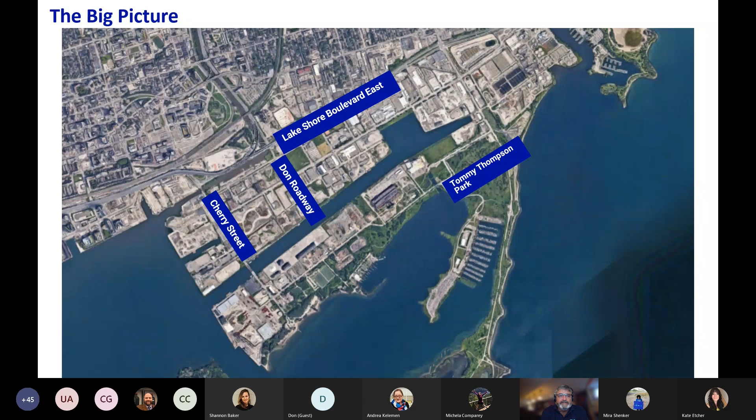With respect to the work we're doing on Port Lands flood protection, we'll be adding about the equivalent of 25 football fields of green space to the area. We're going to zoom in on that area in a minute, but if we can go to the next slide, Michaela or Kate. Oh, there it is. Thank you.

So you can see the area of the project for the Port Lands flood protection work. That work is underway, as Mira mentioned, and this is what it looked like from above several years ago, before we started. We're almost just over halfway through, and are on schedule to complete the project in March of 2024. So next slide, and we'll show you what it'll look like when we're complete.

So you can see we're doing a very large project here, but it is not all of the work that needs to be done. There are other parks that need to be completed once we've completed the river, and three parks, three roads and bridges that we're undertaking. Then there will be development happening on Villiers Island and the south of river precincts, over the next, as I say, coming decades.

You see the new mouth of the Don, Canoe Cove at the mouth of the Don, where we've renaturalized pursuant to the Don Mouth EA, new Cherry Street in its new alignment, and a rebuilt Commissioners and Don Roadway, which are being built to ultimately accommodate LRT transit, but also to accommodate future development in terms of traffic, cyclists, pedestrians, and services.

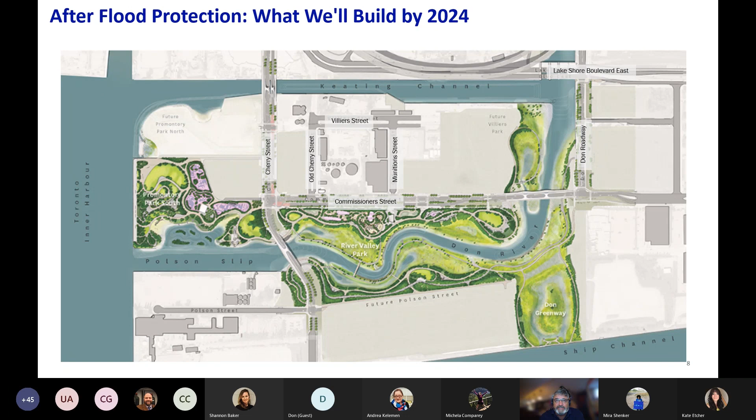Next slide. So an update of where we are today. Go to the next slide. You can see we're working across the entire site, from the north in the SDMA, or the Sediment and Debris Management Area, where work is just beginning.

In the yellow areas, excavation is complete in about 75% of the river, with just one area left to be excavated, which we call the elbow. It's just south of Commissioners Street, at the intersection of these three yellow lines. Work is actually beginning from a soils perspective on the parklands, which you can see in orange, and utilities are being installed on Commissioners Street, New Cherry Street, and the Don Roadway. So a lot of work happening all across the site, and we're going to show some evidence of that with some video and photos coming up next.

This is just a little animation of the timeline for excavation, starting in 2020. You can see that through June of this year, all areas are complete, with the exception of the elbow, which we will have completed in the next month or two. Next slide.

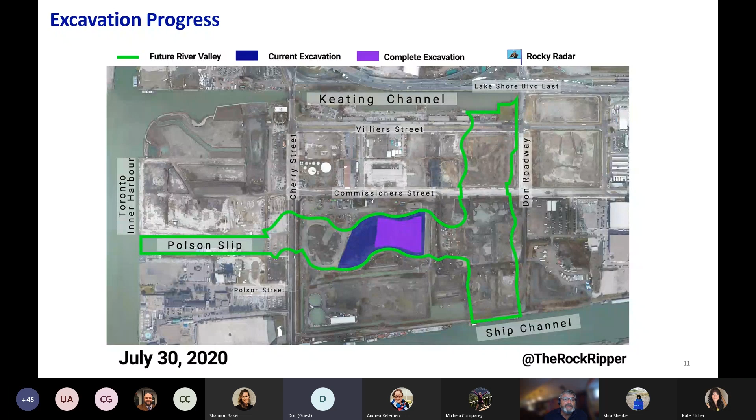You can see the river alignment here through the Central River Valley. It is the sinuous—oh, we've lost the presentation. At least I have. And coming back.

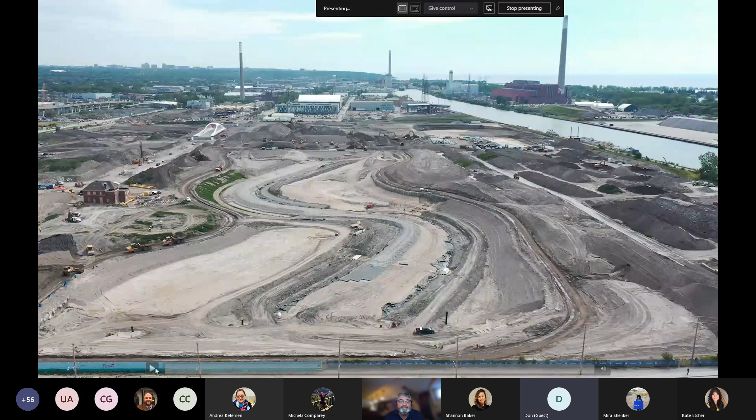Here we go. So you can see the river, the base of the river, the area that the river will follow, is that S curve. That's actually the finished bottom of the river. You can see that we've started excavating at the mouth of the river. So that Polson Slip, we've removed the east end of the Polson Slip, and that's where we will connect the new river to as the mouth.

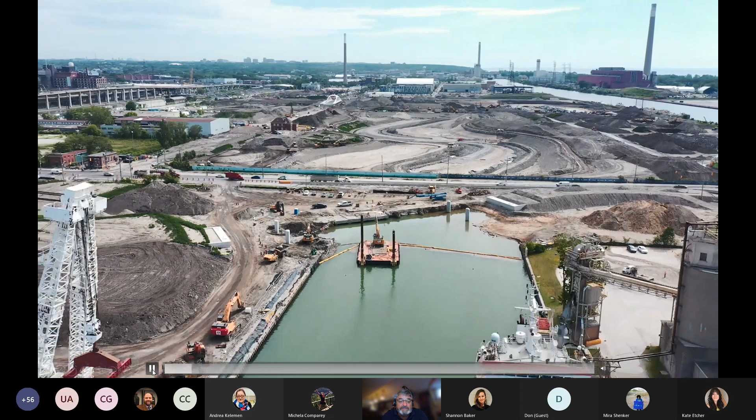It's taking its time. There we go. That work's happening. On the left is the Atlas crane that is being fixed to a degree and will remain in the final park. It's a heritage structure.

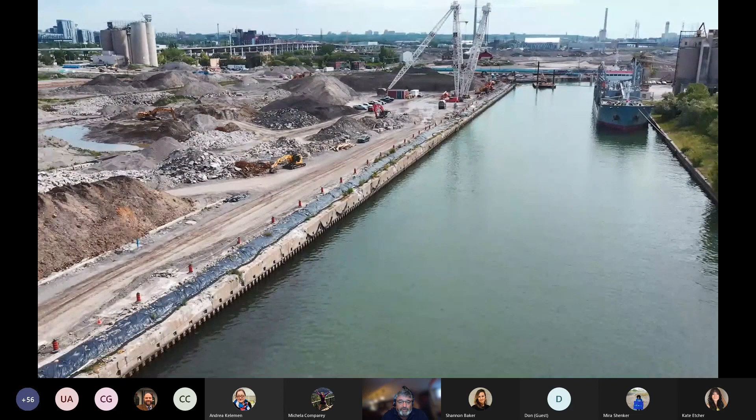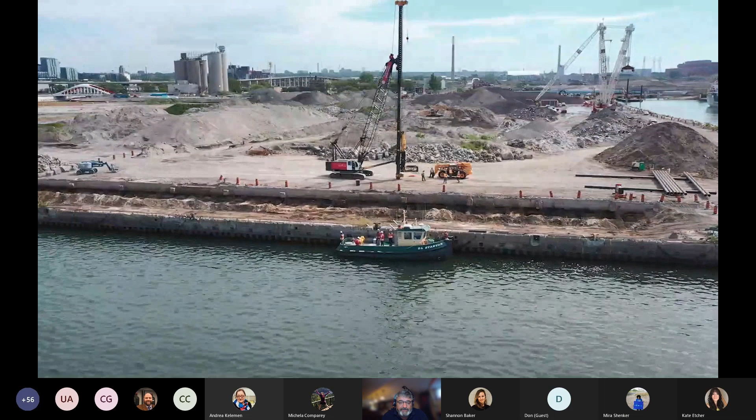Work on the left here is Promontory Park. You can see that we've started working on dock walls. This is the dock wall improvements that need to happen to support what is happening on the promontory.

So Promontory Park is this entire area that you see. This is the Cherry Street Lakefill project that we completed just over a year and a bit ago. So that ultimately will become part of Promontory Park North. That is a future piece of work, not part of what we're doing as part of the Port Lands flood protection.

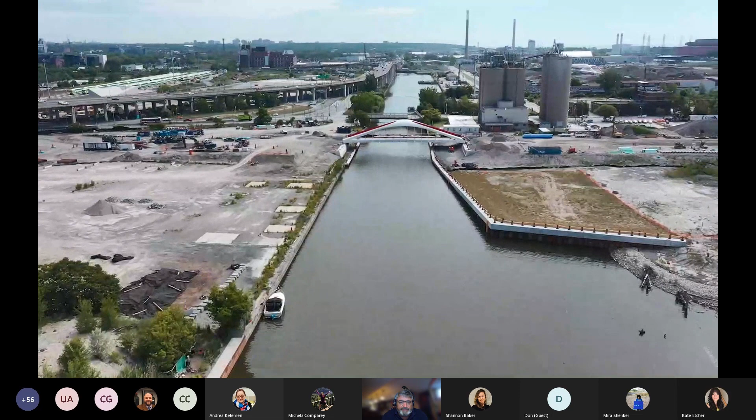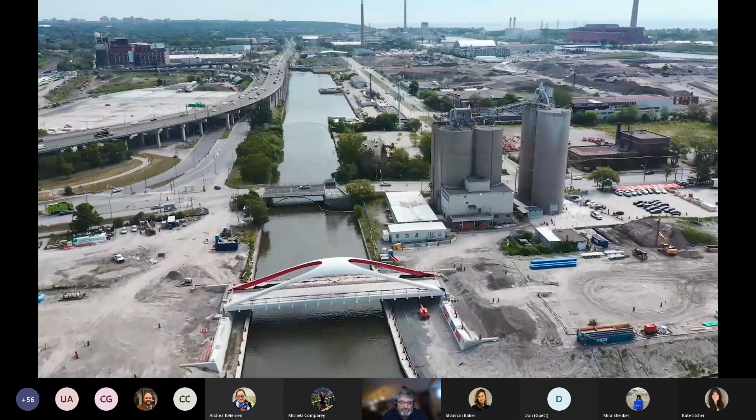You've seen, I think everyone's seen the bridges. This is the Cherry Street LRT bridge. Either later this year or in next spring, its partner will join it, the vehicular bridge for Cherry Street, prior to Cherry Street opening up next August or September.

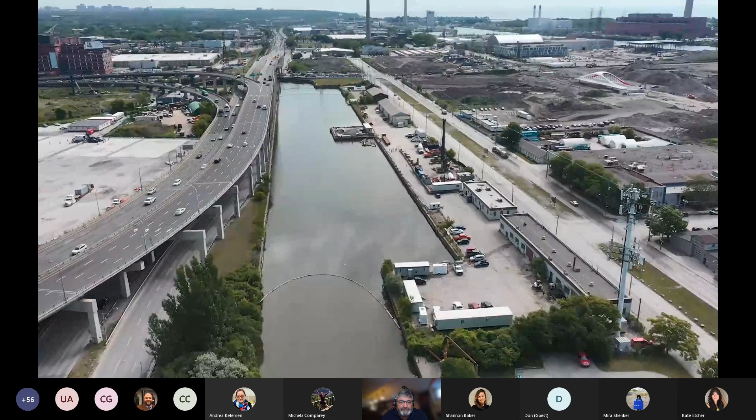Down the Keating Channel, we'll be doing a little bit of work. We're working with the City, Ports Toronto, and TRCA here to undertake dredging, which is necessary to ensure that we achieve full flood protection. The Keating Channel will be part of the flood conveyance system when we're complete in 2024.

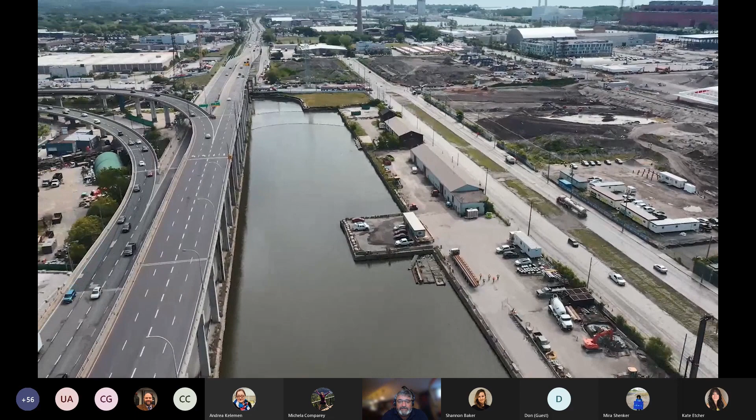You can see to the right, a fair amount of excavation. We'll see that again as we turn up the river. That is the ice management area. To the left here is the sediment and debris management area.

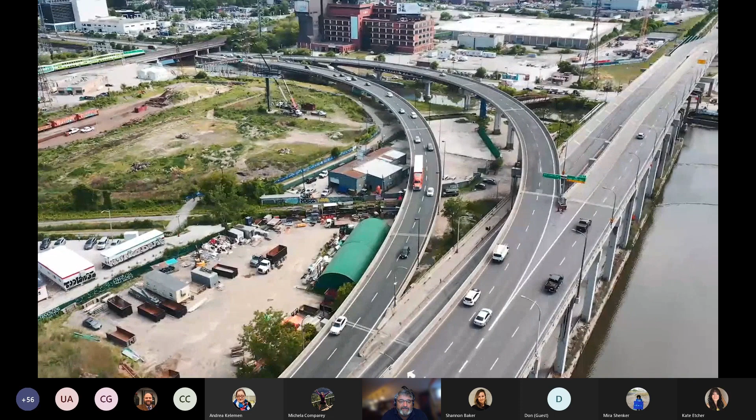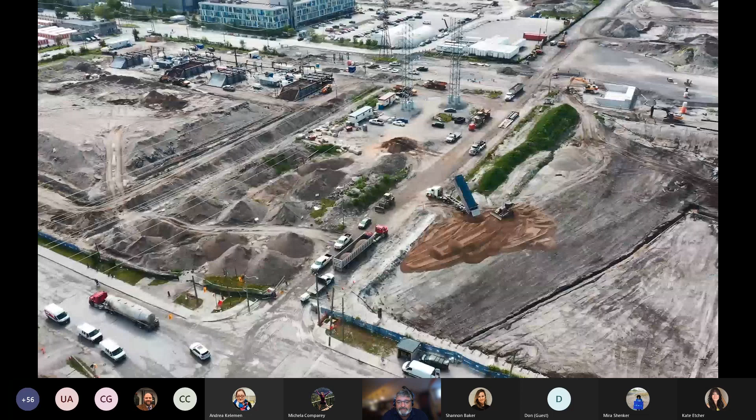Work is started there to clear the site and make it ready for construction to commence in the next month or so. And then as we turn up the river, you'll see that we've started the excavation of the ice management area just south of Villiers Street, which is complete, and we've started to install the environmental barriers that we need there.

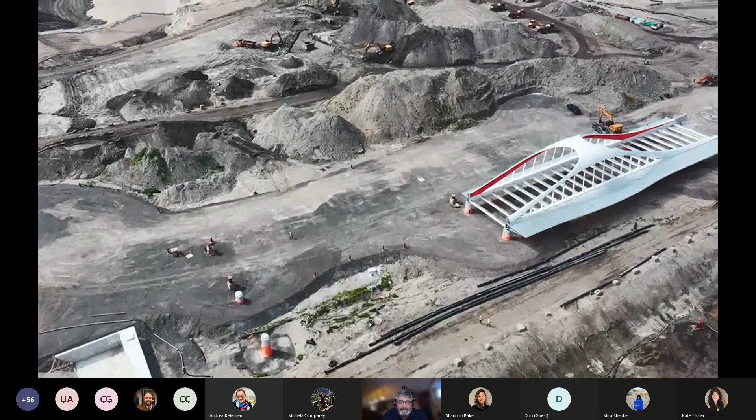In front of us here is the west half of the Commissioners Street Bridge. The east half of this bridge will arrive in late August, early September, depending on the St. Lawrence Seaway. And then here's the elbow excavation underway.

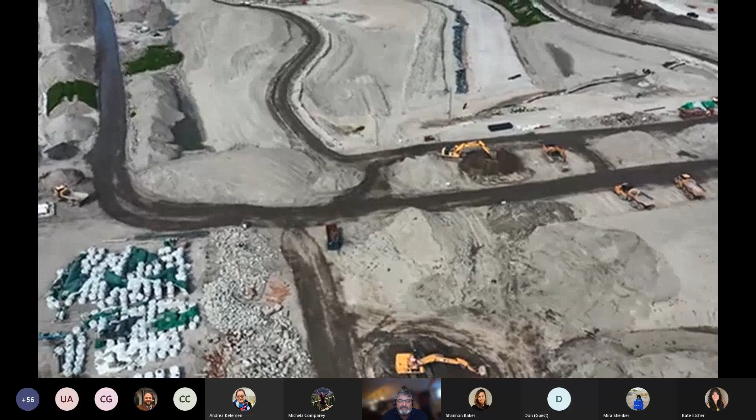And again, back into—we'll see shortly—the Central River Valley with the meandering river valley base and the wetlands on either side, and then parks north and south of the wetlands.

And doing this as a walk takes much, much longer.

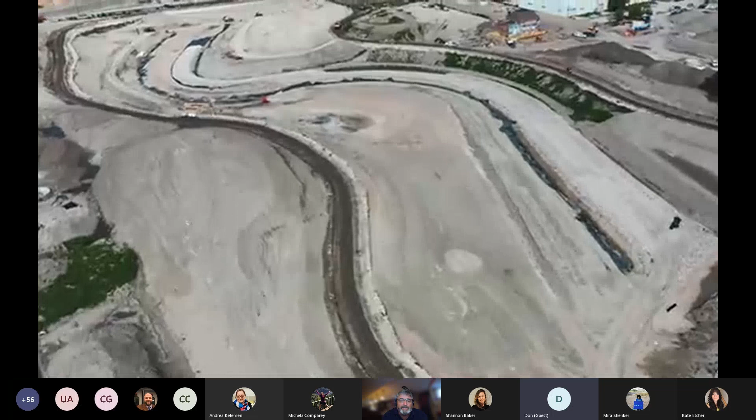So I think that's just about it, with the shot of the skyline always as the last part of what we see here, across to downtown.

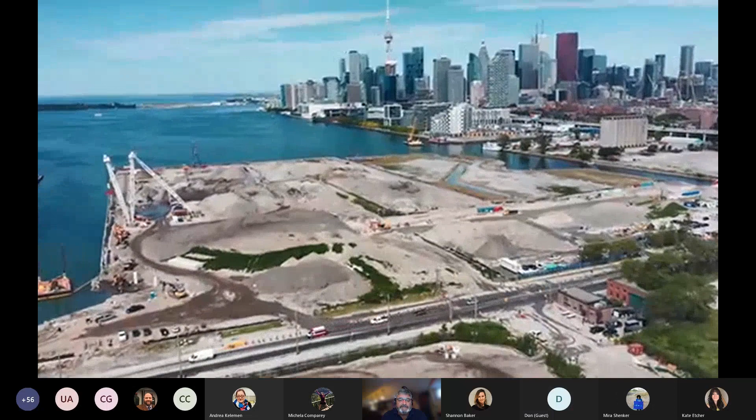So, very large site, work happening all across it, as you can see, by our construction manager, EllisDon, and our consultants, MVVA, Intuitive, and WSP, working very hard to keep the project on time and on budget.

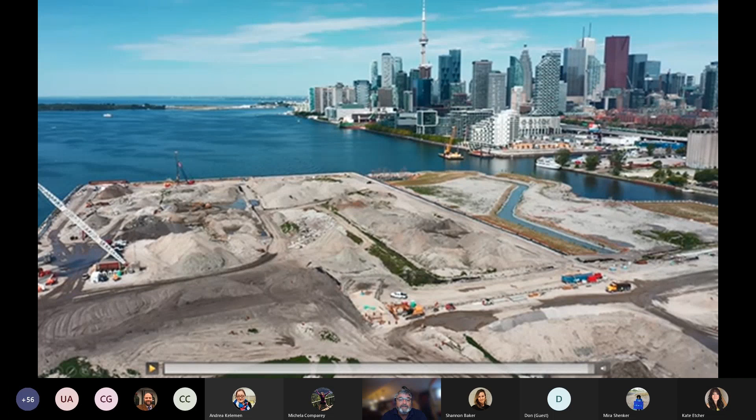So some of the work that's happened recently: we have relocated Fire Hall 30. This is a heritage structure built in the 1920s. It had to move, not very far, but it had to move because of the new elevation of Commissioners Street, and we have widened Commissioners Street to accommodate LRT. Unfortunately, this building was in that widening.

So we have relocated it. It will be part of the future park, one of the park elements. We're starting by putting public washrooms in it, but ultimately the city will be deploying this building for other uses in the park.

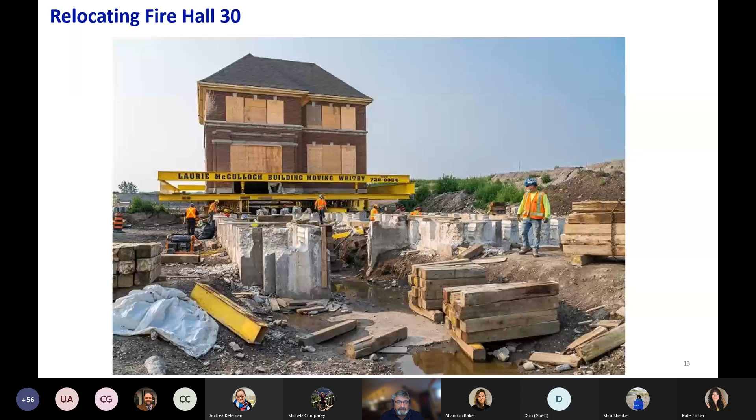There are other ways as well. We'll be putting in armor stoning and some other features that will protect the banks of the river from erosion in the event of a flood.

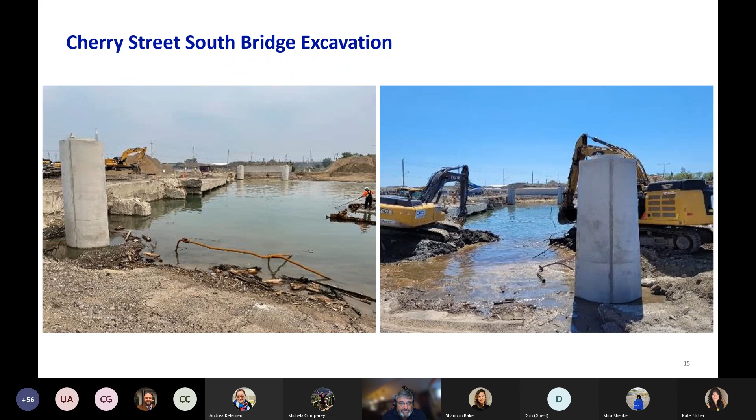We started excavation at the river mouth, at the end of the Polson Slip. We've excavated to remove the soil beneath the Cherry Street South Bridge so that when that bridge arrives in October or November, we can install it without further excavation. Just east of that bridge is our diaphragm wall, or west plug, which keeps the river excavation dry while we complete structural and planting work. In 2023, we'll remove this plug to allow the harbor to flow into the river, and then open the north plug to let the Don River make its full journey through the Port Lands into the inner harbor.

Regarding the Commissioners Street Bridge: the west bridge arrived in May. The east half of this bridge, which will look just like it, will arrive in the next month or so. Both bridges will then be connected and put on their final foundations, allowing for the reopening of Commissioners Street sometime next summer, in June or July.

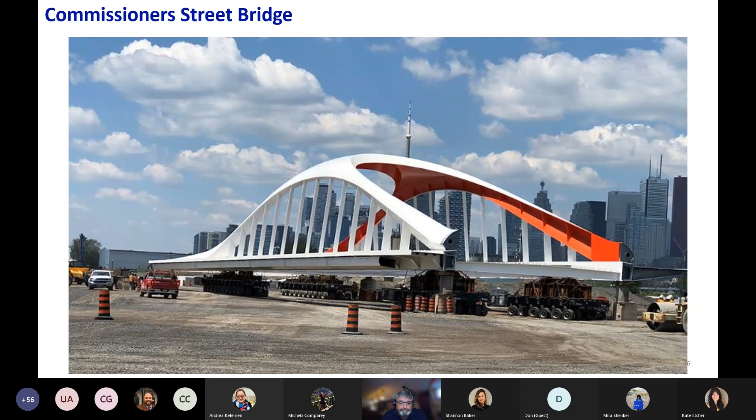Thanks, David. I think that's it for me. Yeah, that is it for you.

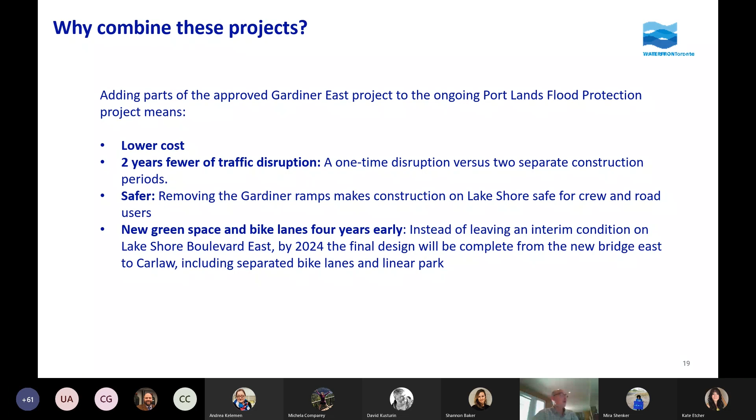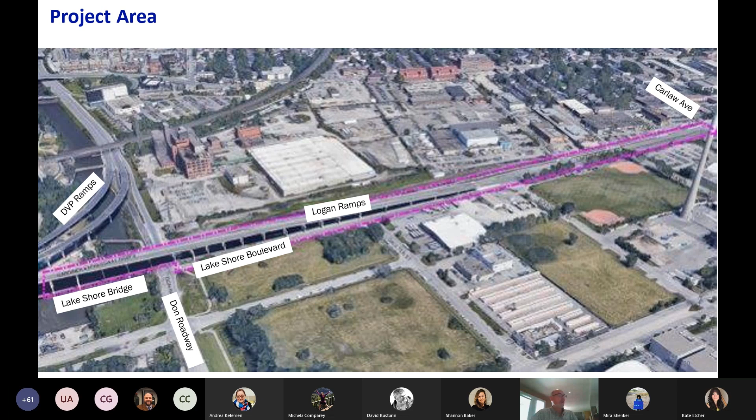So the initial focus is to remove the overhead Logan ramps, highlighted in pink, extending from the DVP ramp connections in the west over to where they touch down at Lake Shore, just before Logan.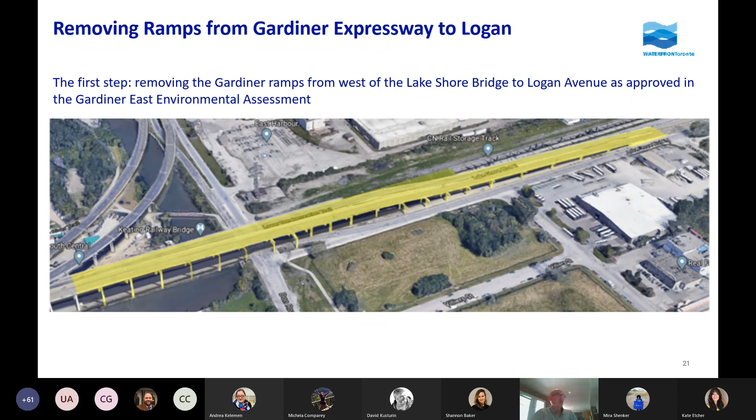The works include essentially two pieces. The first is the bridge, the Lake Shore Boulevard Bridge that sits over the Don River. There are two main components: one is a lengthening of the bridge in an east-west direction, to allow the widening of the Don River mouth to facilitate river flows associated with the Portlands flood protection project.

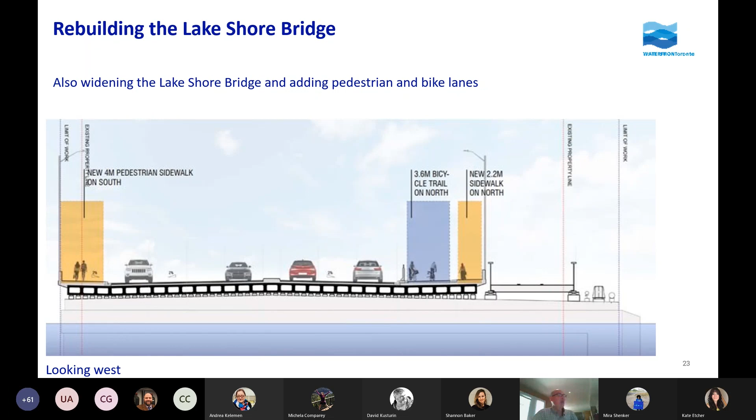The second is a widening of the bridge in a north-south direction, to accommodate pedestrian and cycling facilities as well as roadway lanes shown in this cross section. This is a western-looking view of the new cross section, starting on the south side with a pedestrian sidewalk, 3 eastbound travel lanes and a left turn lane to provide access onto the Don roadway, then 3 westbound road lanes, a cycle pathway, and a sidewalk.

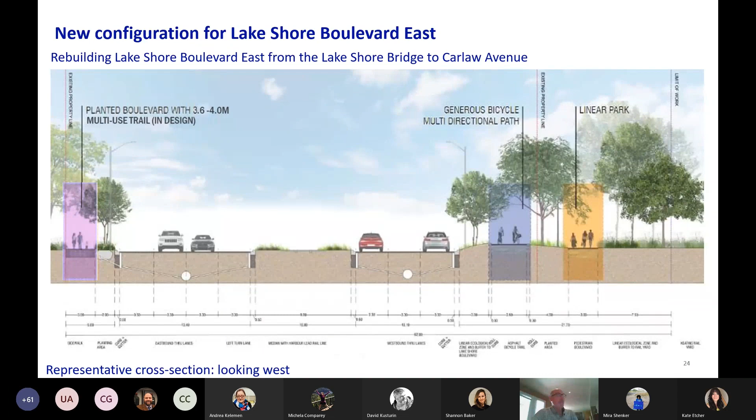Further east of the Don River crossing, improvements to Lake Shore Boulevard will continue. Again, a western-looking cross-section shows new pedestrian facilities, 3 lanes of through traffic in both directions, a center median that could accommodate relocation of the Harbour lead line, new green space, a separated bike path on the north side, and a pedestrian pathway further north.

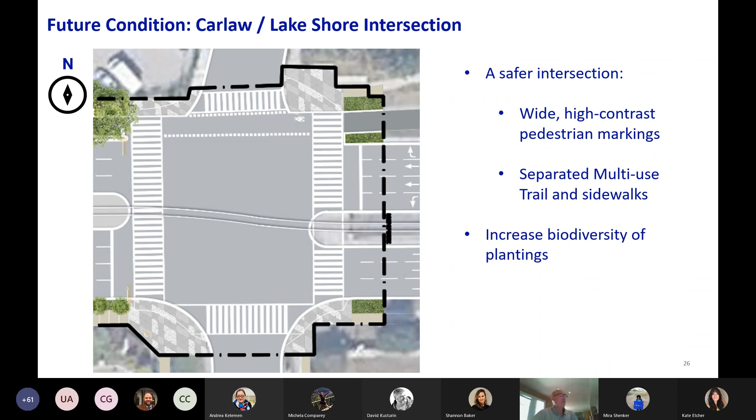This drawing shows the proposed improvements at Carlaw and Lake Shore Boulevard intersection, clearly showing new pedestrian and cycling markings intended to provide a safer crossing environment, including Lake Shore Boulevard, as well as how new pathways connect with this intersection and new plantings associated with the roadway improvements.

Looking west at Booth, we see existing conditions. The key point with this photo is that there currently exists no north-south crossing of Lake Shore Boulevard under existing conditions.

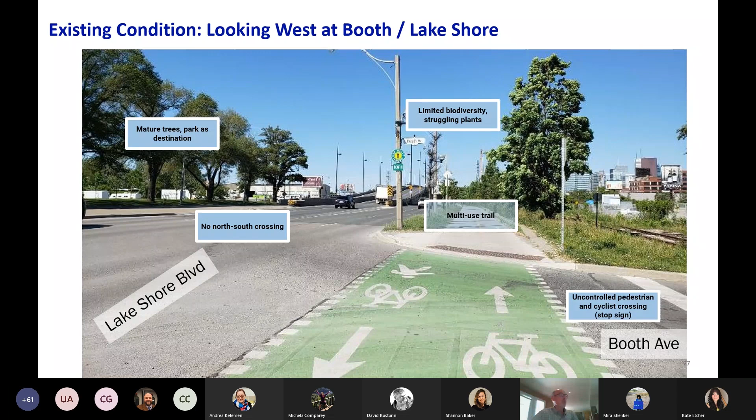Looking west on the north side of Lake Shore, we see the existing overhead Logan ramps on the left of the image, giving a generally highway character to Lakeshore Boulevard.

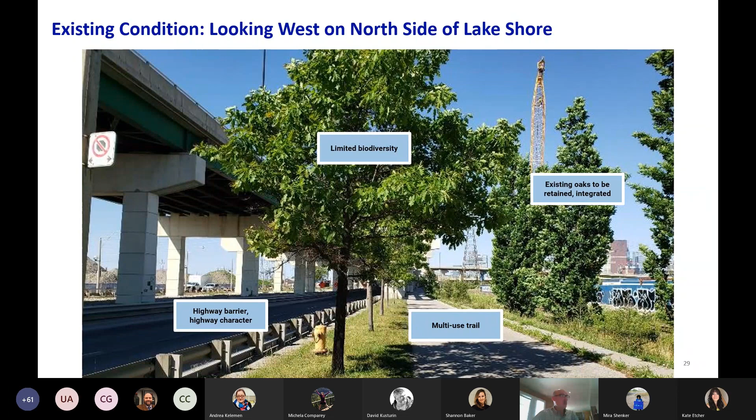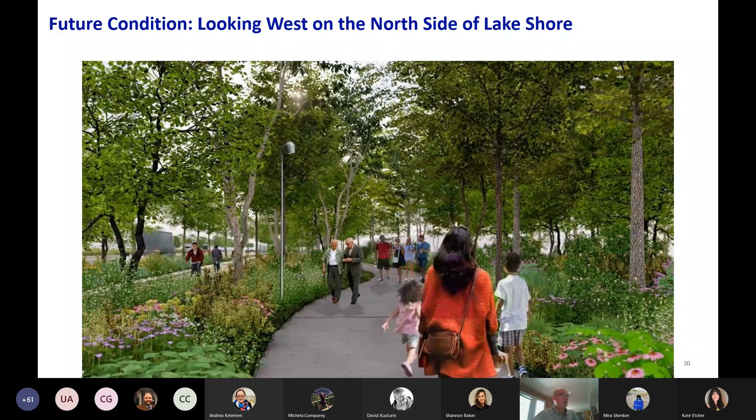Here are the improvements: the cycle path and pedestrian walkway, as well as generous new plantings including new trees, creating a greater amount of shade during summertime and a new microclimate along the north side of Lake Shore Boulevard.

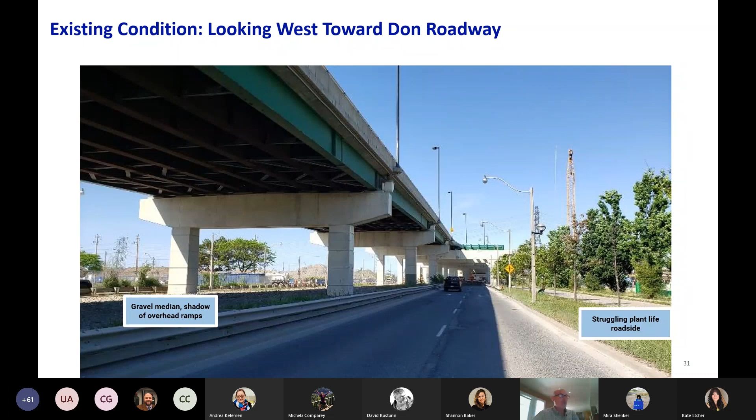Looking west, getting closer to the Don roadway, the overhead Logan ramps are again foremost in the image, with some plantings on the north side of the boulevard associated with the Martin Goodman Trail.

From the driver's perspective, looking west, there are 3 lanes of road traffic, and the planted area on the north side of the boulevard.

Now looking east at the Don roadway, with the existing multi-use path very close to the roadway and the overhead Logan ramps.

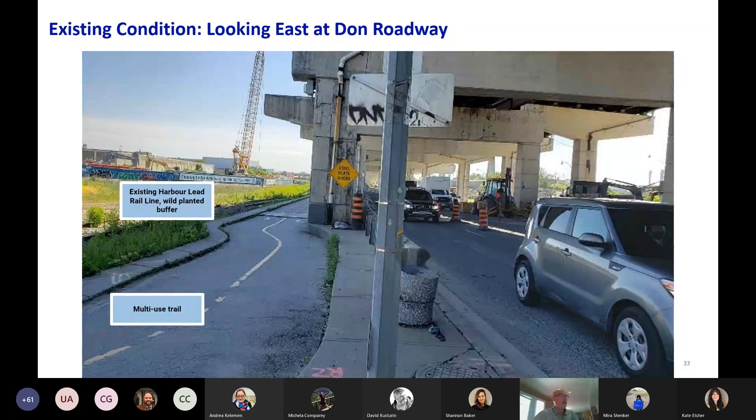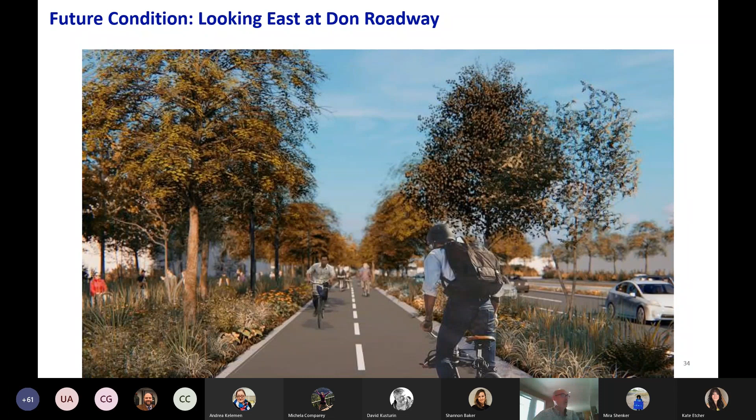Here we see the pathway looking east: the cycle path just to the immediate north of the road lanes, and further north, separated by a planting area, is the pedestrian walkway.

Next, here we have an overview plan view of the new bridge, the wider, longer bridge, as well as the new intersection at Don Roadway that shows pedestrian crossings possible on all legs of the intersection, and then the tie-ins of the cycle path to go along the north side of Lakeshore, as well as down to the south of Lakeshore along Don Roadway.

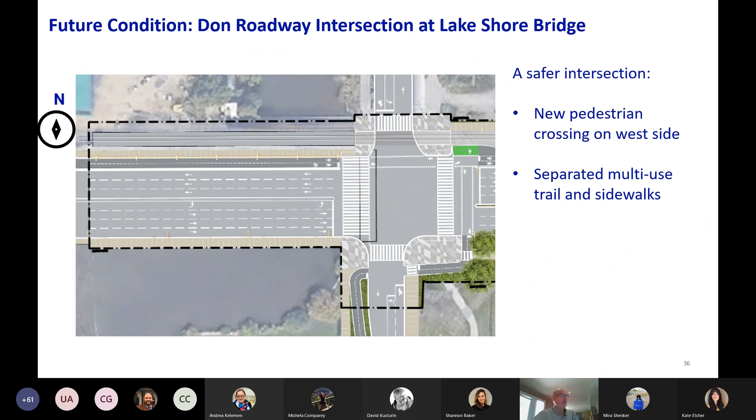Now that I've shown you what the future is going to look like, the next set of slides will talk about the construction of the project, the timing of that construction, and the various traffic mitigation measures that will be put in place to minimize travel disruption during the construction period.

The removal of the ramps, which is to be focused during the weekend period, is to be initiated in September and extend into October, so roughly about a month to two months to remove those ramps.

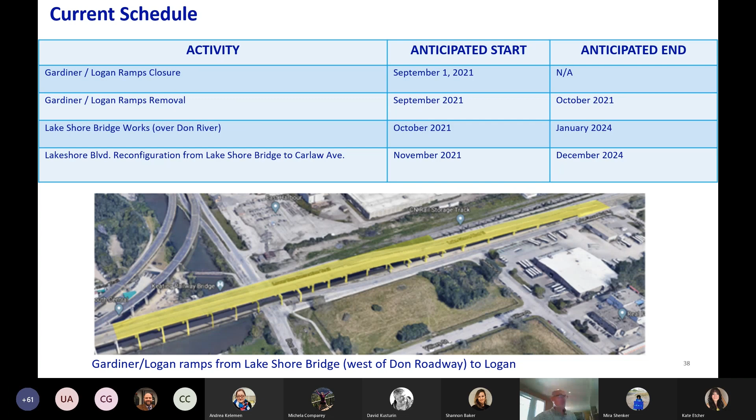Once the ramps are out of the way, work on the reconstruction of Lakeshore Bridge can commence as of October, expected to extend out to January of 2024. Associated with that, and soon following the removal of the ramps, will be the start of the reconstruction of Lakeshore Boulevard from the bridge over to Carlaw Avenue, extending out to December 2024. So a little over a 3-year construction period for this project.

Appreciating that there are many challenges in this area associated with the construction of this project: first and foremost, this is a very high traffic area for cars, trucks, cyclists, and pedestrians in all directions, which certainly makes it challenging to manage the movement of people through this corridor.

With the removal of the Logan ramps, we need to appreciate that this will put more traffic at the Jarvis Lakeshore Boulevard intersection, as that becomes one of the main access points to come off and access the Gardiner. With removal of the Logan ramps, as well as removal of the overhead ramps, that will put more traffic through the Don Roadway and Lakeshore Boulevard, which again is a focus of the construction area.

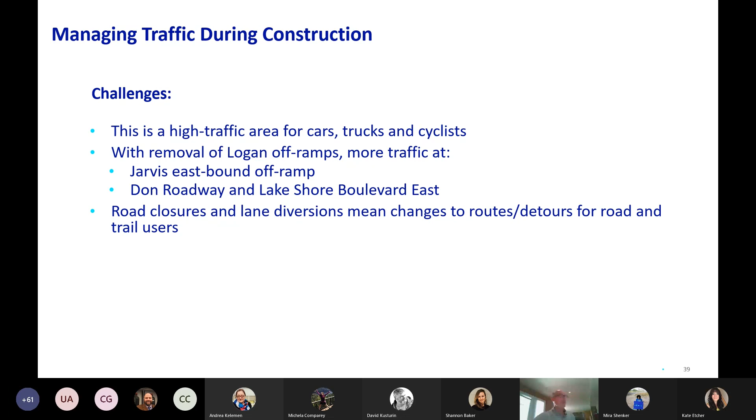As well, with the road closures, there will be a requirement of lane diversions or lane reductions, which also means the need to develop and manage detours for vehicles as well as for pedestrians and cyclists through this period. So the next set of slides will focus on what these mitigation measures are.

The study area extends up to Bloor and Jameson in the west, Vic Park in the east, and down to Lakeshore or the lake in the south. One of the key findings from the modeling work is an indication that drivers and vehicles will continue to choose the Lakeshore corridor as the main means for east-west travel through the corridor. As a result, the necessity is to be able to manage that demand through this corridor throughout the construction period.

In developing the traffic management plan, it was developed with input from a number of stakeholders and interests, including various city departments, residents, business owners in the area, as well as road and trail users. It's important to appreciate that in developing a management plan, we're really attempting to forecast and understand how traffic will react to the various changes to the road network during construction.

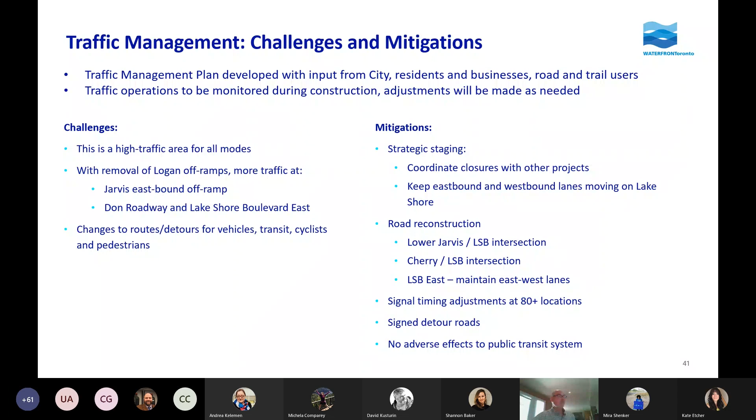Next slide. So starting to get into some of the details regarding the traffic mitigation plan.

On this slide, the first point is the reconstruction of the eastbound off-ramp at Jarvis for drivers to exit the Gardiner. With the removal of the Logan ramps, the Jarvis off-ramp becomes the last off-ramp to exit the Gardiner before accessing the DVP.

The second point is related to Lakeshore Boulevard. Throughout the construction period, keeping two eastbound lanes and one westbound lane open at all times, again to facilitate that flow of traffic through the corridor.

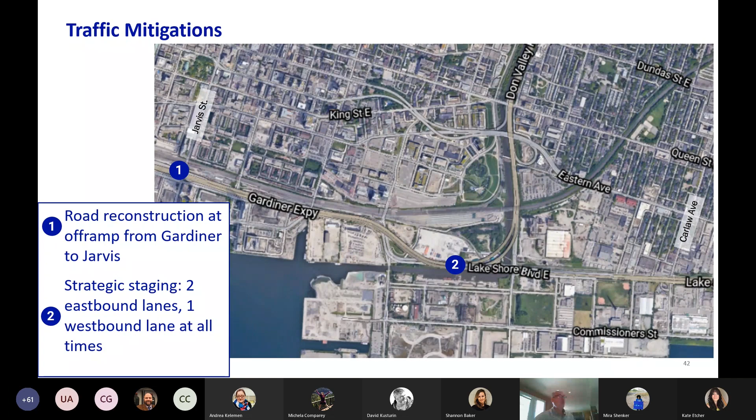Next slide. As indicated earlier, the Jarvis Street intersection and the Gardiner eastbound off-ramp are certainly an important part of the traffic management plan. Many people appreciate the complexity of this Jarvis Street intersection, and a number of changes are being implemented to accommodate the higher flow of traffic that will now come through this intersection with the closure of the Logan ramps.

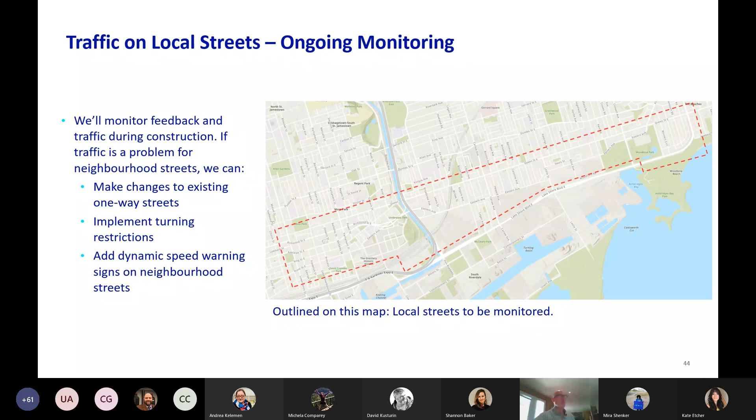Some of these mitigations are shown here as examples, including making changes to existing one-way streets, implementing turning restrictions onto some streets for certain times of day, and adding dynamic speed warnings on some neighborhood streets if speeding is identified as an issue. But again, this is a long-term monitoring program that the City and Waterfront Toronto will continue to examine during the course of construction.

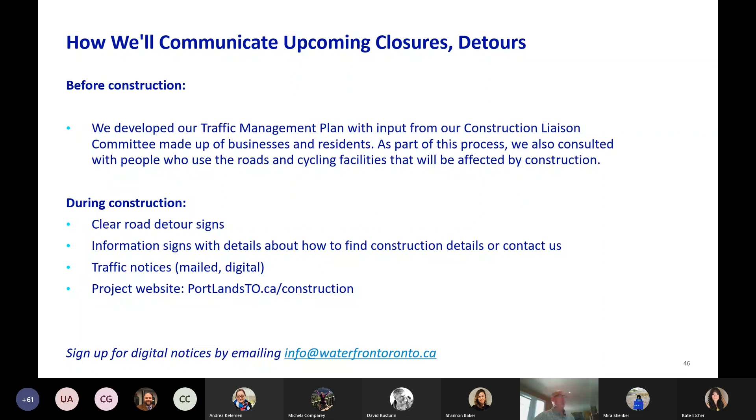Okay, so first starting in September, next month, extending into October during weekdays.

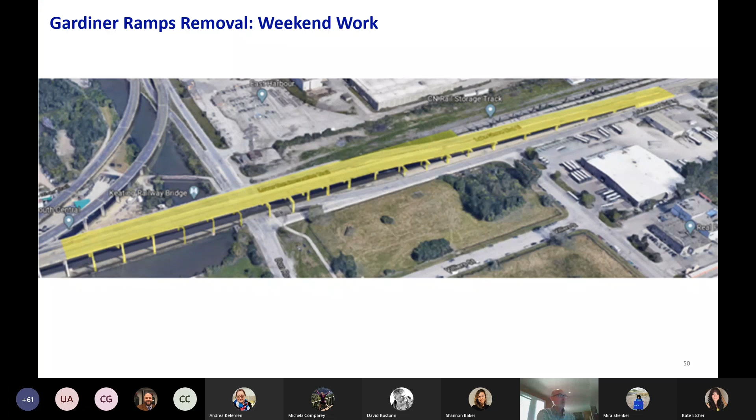During weekends is the focused period for the removal of the Logan ramps explained earlier. Lakeshore Boulevard in both directions, extending from Carlaw over to Cherry, will be closed. That closure is required to allow the safe removal of those overhead ramps, since people cannot be underneath the area during demolition, so that requires the closure of Lakeshore Boulevard East through this section.

Detours through the area on weekends follow a similar route as indicated earlier for weekday Portlands traffic: Villiers, Salter, Commissioners, Carlaw. For east-west movement, it would be to the north, up Carlaw, Eastern, Broadview, and across Queen or across Eastern. To access the DVP, the Queen Street on-ramp would be the main access point, or the Eastern on-ramp would also be available for northbound access.

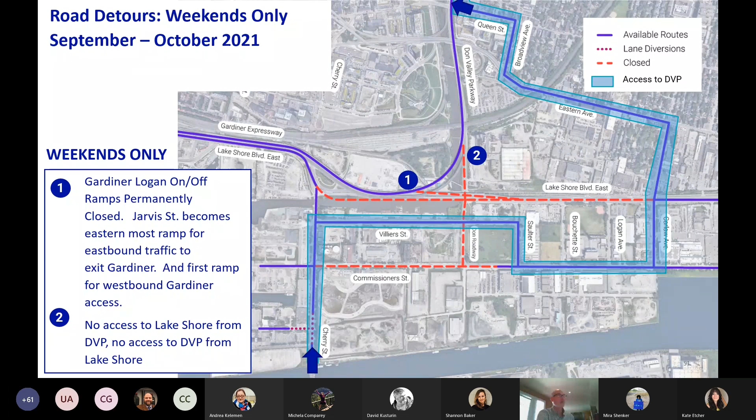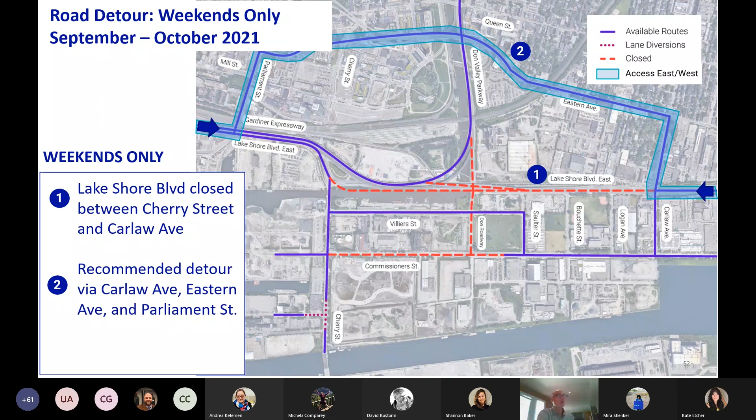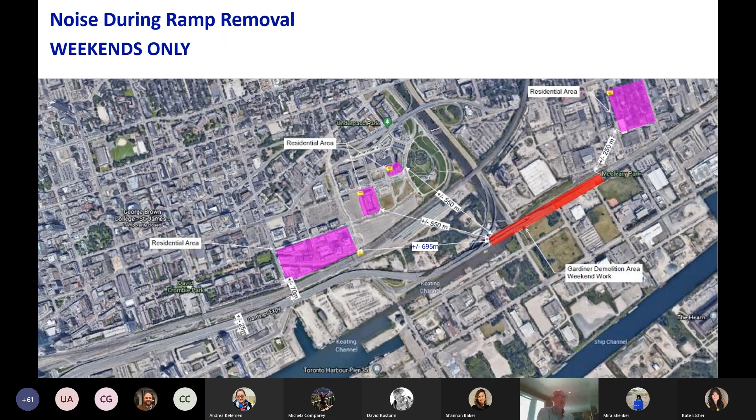There will be noise monitoring undertaken, as well as a program set up for residents to make contact should noise become a concern, so that the project proponents can look at ways to mitigate noise issues should they emerge. But again, we're seeing fairly significant separation distances between the project area and the residential areas.

Next slide, please. So then moving into October to August 22, now that the Logan ramps are out of the way, construction on the Lakeshore Bridge and Lakeshore Boulevard East can advance. Next slide.

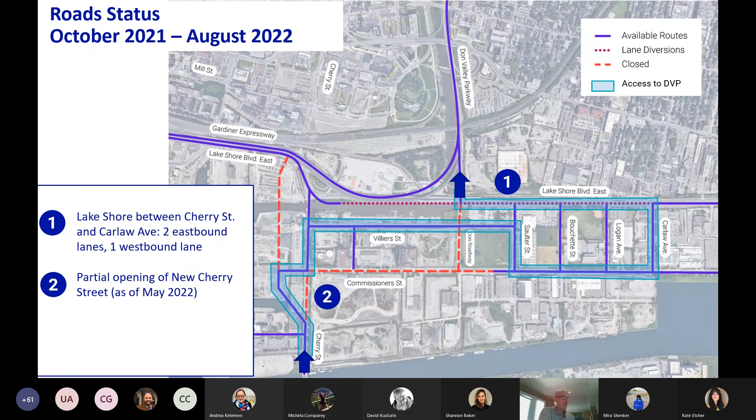Item 2 just highlights the partial opening of the new Cherry Street alignment, just to the west of the existing Cherry Street alignment, which would be expected to open by May of 2022. Next slide.

In addition to the closures and detours associated with road traffic, similar plans are also required for the movement of cyclists and pedestrians through the area. So the next set of slides focuses on those detours.

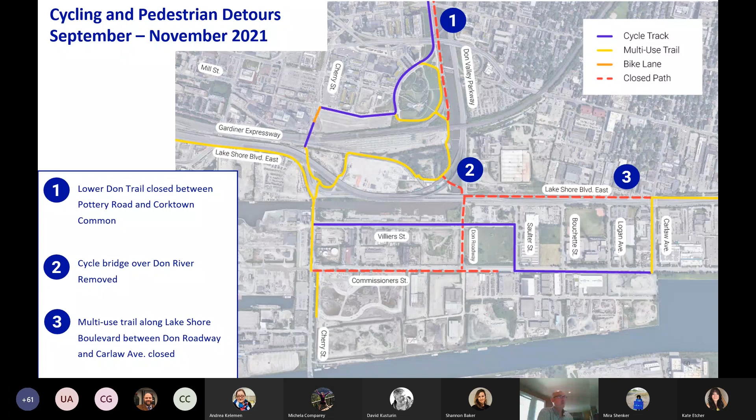And then to the north, the use of Cherry Street and Mill Street, and then up Bayview, as well as the maintenance of the trail through the Keating Precinct area just to the north of Gardiner, as shown in yellow. Next slide.

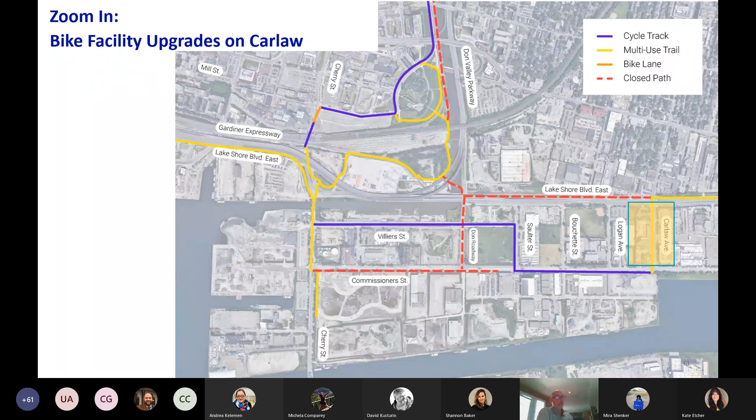So then, just to highlight some of the improvements associated with Carlaw and Commissioners associated with the main east-west detour, I'm just going to focus in on Carlaw. Next slide.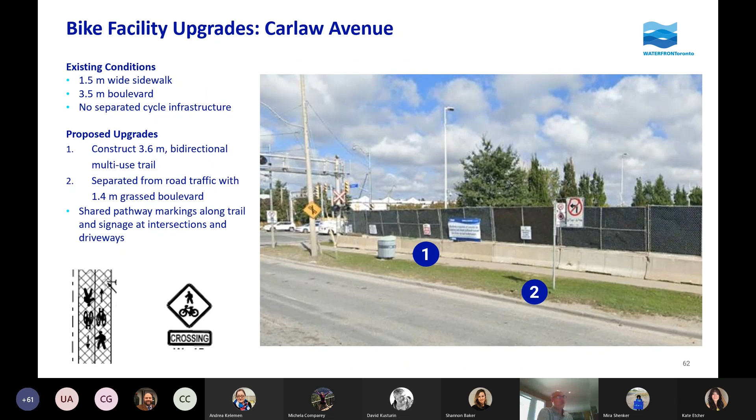So we have an existing condition of a sidewalk on the south side, but it only extends between Don Roadway and Logan, and there's no separated cycle infrastructure along Commissioners. So the upgrades would include first extending that sidewalk on the south side from Logan to Carlaw, and secondly, constructing separated eastbound and westbound cycle lanes along Commissioners. Commissioners is to be a single vehicle lane in each direction, and Saulter to Carlaw are to be separated from parking and travel lanes with a concrete barrier, for more safety protection for cyclists.

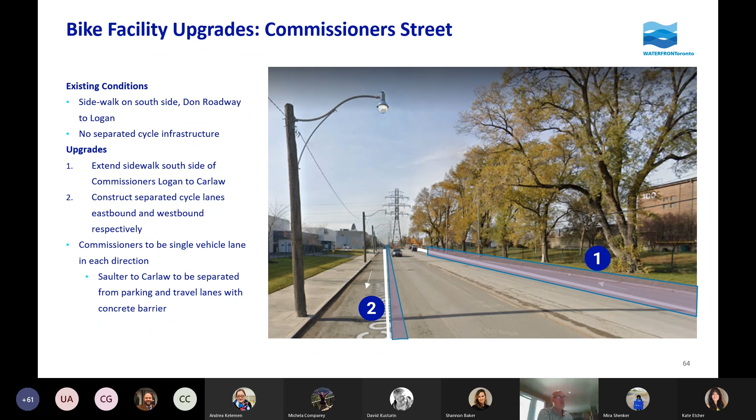Next slide. So now showing detours from that November 21 period to May 22. Again, the ramps are out of the way, but construction of the bridge on Lakeshore Boulevard East is underway. The main detour route is primarily Carlaw, Commissioners, Saulter, Villiers over to Cherry, and then north on the north side. Number one shows the closure of the Lower Don Trail, done in tandem to accommodate the initiation of construction of the sediment debris management facility on that parcel, requiring closure of the trail system. So there's a reliance on Cherry and Mill to avoid this section of closed trail.

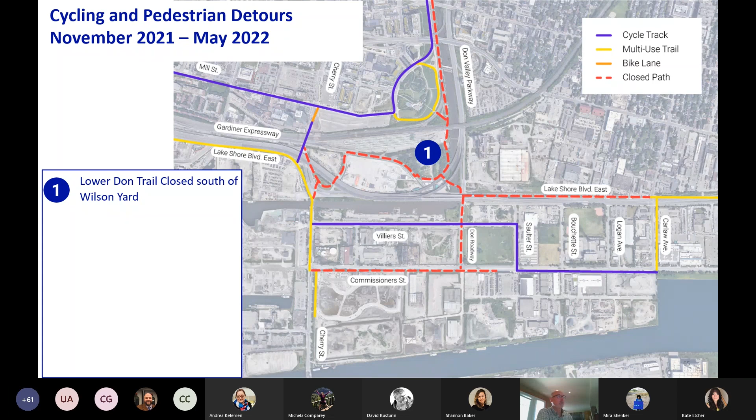Next slide. We're just zooming in a little bit on the improvements near Cherry and Lakeshore to facilitate the detours.

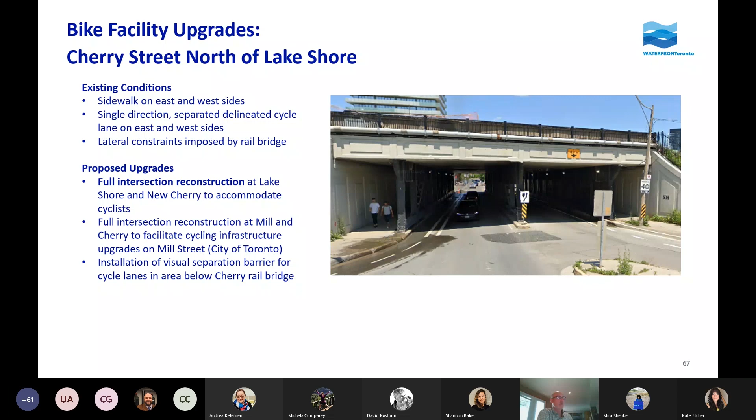So we have an existing condition of sidewalk on the east and west side, single direction separated delineated cycle lane on east and west sides, but lateral constraints due to the existing rail bridge that Cherry passes under. The upgrades to facilitate this include full intersection reconstruction, including at Lakeshore and New Cherry, as well as intersection reconstruction at Mill and Cherry to facilitate cycle infrastructure improvements, as well as installation of a visual separation barrier under the rail bridge between the road lane and the cycle lane, so bollards would be installed to separate those lanes under the rail bridge. Next slide.

Again, showing detour routes from May to August of 2022. Key change here is a partial opening of New Cherry, shown on number 1. Next slide.

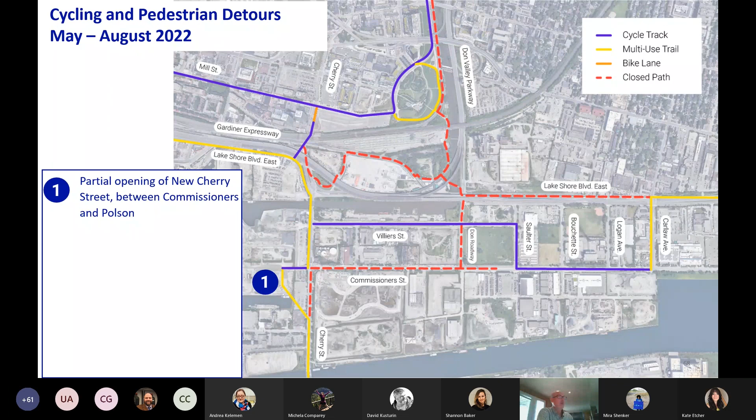And then from August 22 to March 24, we have New Cherry along the western edge there fully open, so available as part of the detour. And then the transition of the east-west detour from Villiers down to Commissioners, similar to the detour for road traffic, and the more northern detour as well, shown with Cherry and Mill Street.

Next slide. So I think at this point I pass it back to you, Mira, to talk about consultation that has occurred with the road and trail users.

Sure, thanks. I think this is also a good moment for a slight pause to acknowledge, as Dawn did, that this is a lot of information that we're presenting all at once. Of course, the individual phases for the detours, both for cyclists and pedestrians and for drivers, are going to be rolled out as they change, and we'll walk people through it. There'll be more opportunities than just this one meeting to walk people through it, and to flag concerns or comments as we move through the various phases of construction. We are also circulating versions of these maps in addition to this.

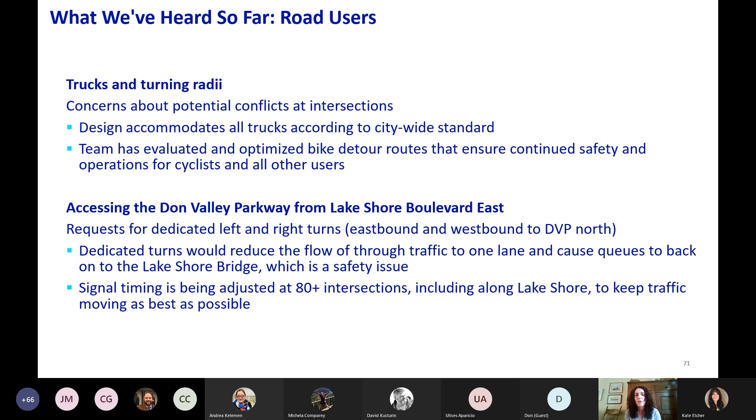There was also a request for more east-west lanes on Lakeshore Boulevard East during construction, and to adjust our plans for those partial closures. As Dawn was walking everyone through, there's a plan to keep 2 eastbound lanes open and 1 westbound. That's based on the extensive traffic modelling that found the majority of traffic on Lakeshore is going eastbound, which is why those 2 eastbound lanes are staying open.

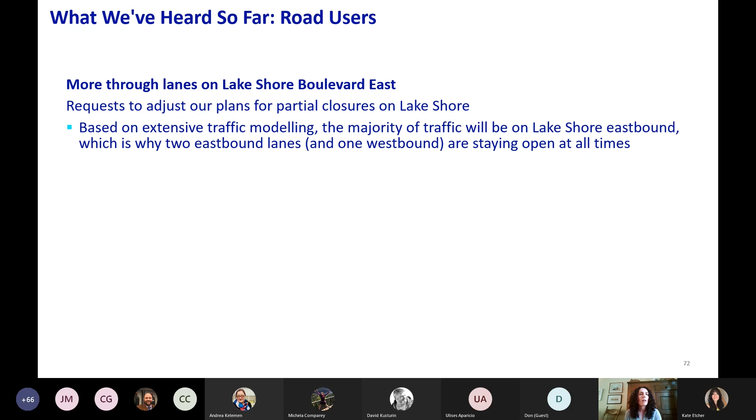What we've heard from cyclists using all the trails through this area is that all routes should have physical separation. We definitely agree, and as Dawn walked you through, any of the temporary detour routes will have jersey barriers, which are higher than the lower concrete curbs you might find in some more permanent facilities. That includes along that extra stretch of Commissioners. Where we have multi-use trails, they will also be separated by either a curb or a planted buffer.

There were concerns raised about lighting and road surfaces. The lighting was evaluated through the entire detour system, and there weren't any flags. There are some spot repairs planned along the detour route—for example, on Carlaw, where we have some uneven surfaces, that will be addressed as the routes are installed.

Also, some concerns were raised about intersections where you have a bi-directional trail, so cyclists on the east and west side of the street, or on the north and south side, meeting up with a unidirectional trail where cyclists are going east-west in the same place or north-south on the same side.

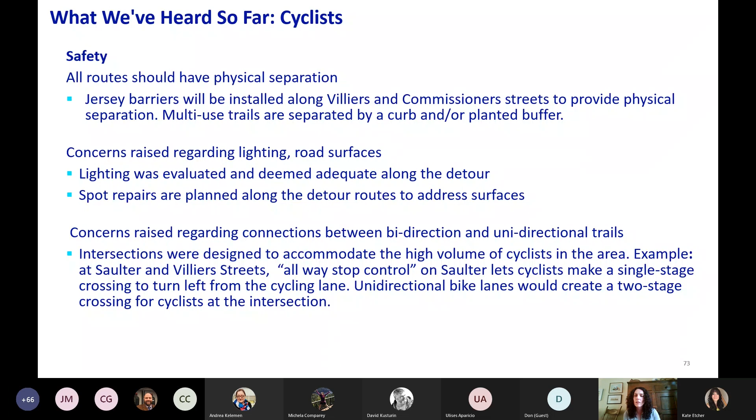Safety continued as a theme. We had questions about intersections, so all those same questions about physical separation and safety along the routes were raised at intersections as well. There are some changes.

Don alluded to rebuilding some of those intersections at Cherry and Lakeshore to make a more direct, especially north-south, route for cyclists. That will become much more direct and more protected for cyclists moving through the intersection.

The team also analyzed turning movements at intersections and made sure that the geometry of those intersections accommodates both large trucks and other more sensitive users of those roads, so that we're avoiding conflict at those locations.

There were questions about the selected routes, which we won't get into a lot of detail here, but this is a collective effort across teams, also working with the city, on the routes being recommended. There are other ways to travel, and that's at the cyclist or pedestrian's discretion. We've highlighted the ones deemed safest and most convenient, as in most direct, but we will create versions of these trail detours in Google Maps, which would allow a cyclist to plan their trip based on preference, seeing what conditions they'd be riding through and making decisions about whether they'd like to take a different route.

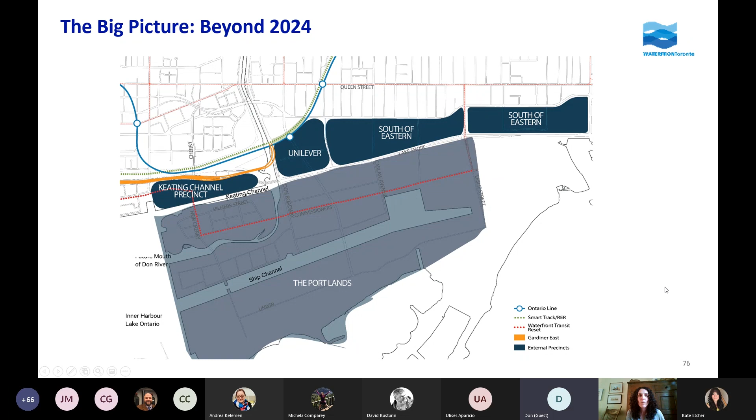Once construction starts, we're planning another public information center in September to check in on traffic impacts, noise impacts, and provide additional construction updates. At that point we'll provide updates just for the next coming quarter, so it won't be this full overview again — just moving forward with the types of updates you saw David give for Portlands flood protection.

In the meantime, we'll be posting regular updates on the construction page of the dedicated project website, portlandsto.ca — you've got the link there. If you have questions or concerns about construction, there's a dedicated phone and email, as well as an online form to submit comments or complaints through our project website. So there are various ways to reach us, and we'll also be sending notices.